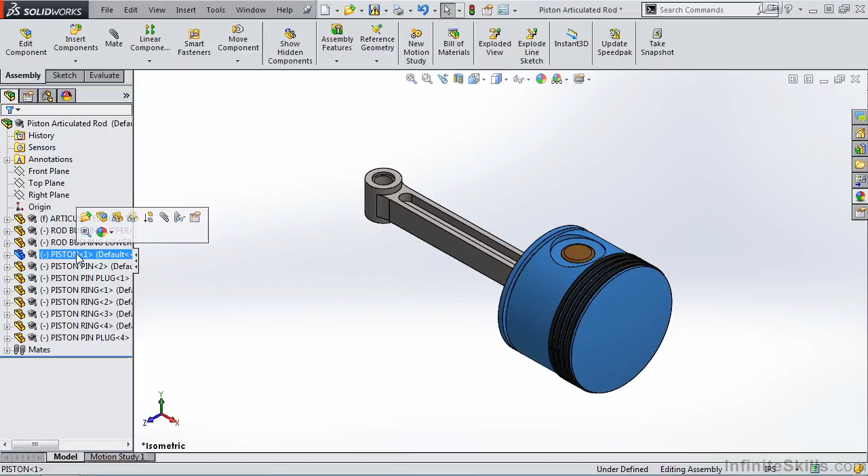One method for hiding the piston is to do it in the Feature Manager design tree. Simply select the piston, a pop-up menu appears, and notice we have two icons with glasses. The first one is Hide Components. The second one is Change Transparency. We'll select Hide Components. And now notice on the screen, the piston is hidden.

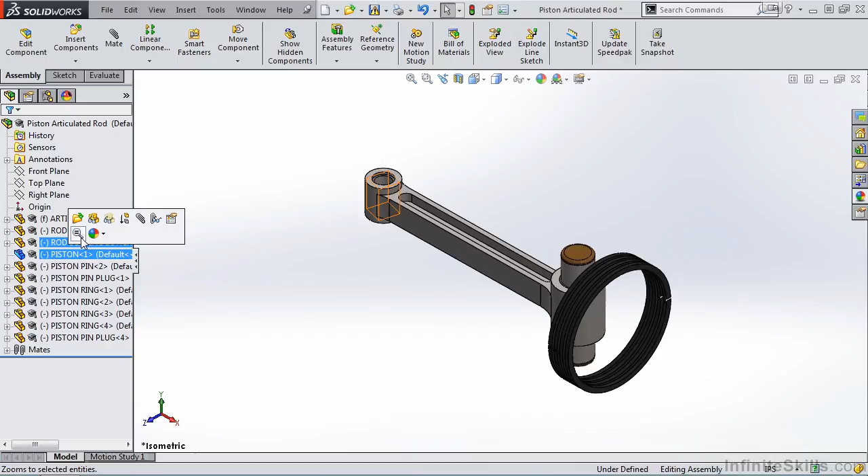Also notice in the Feature Manager design tree, the change in the part graphic. Notice the part icon graphic as compared to the other parts. If we would like to unhide the piston, you simply click on the piston and select Show Components.

Another option for hiding a component is to select a component on the screen. The same pop-up menu appears. Now this time, instead of selecting Hide Components, let's try Change Transparency. And it simply changes the transparency so you can see through the part.

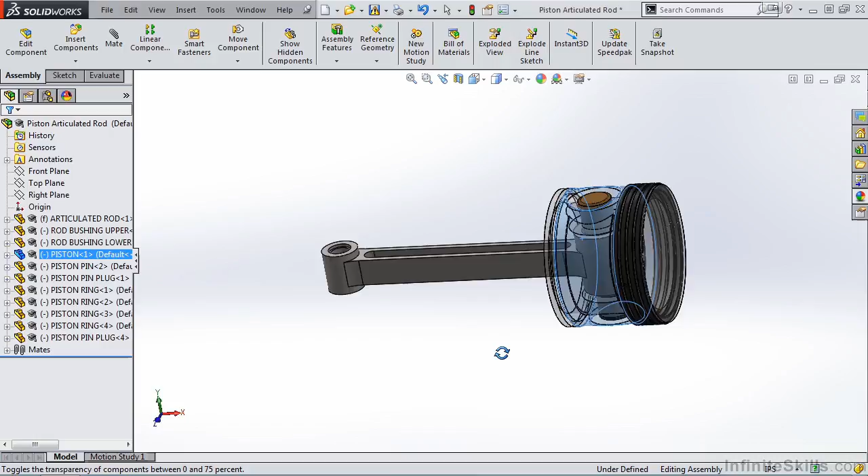Now we have one more option for hiding and showing components along with changing the transparency, and that is through the task pane. If we expand the task pane, notice we have 4 columns. The first one is for Hide Show. The second one is for Display Mode. Third one, Appearances. And the last one, Transparency.

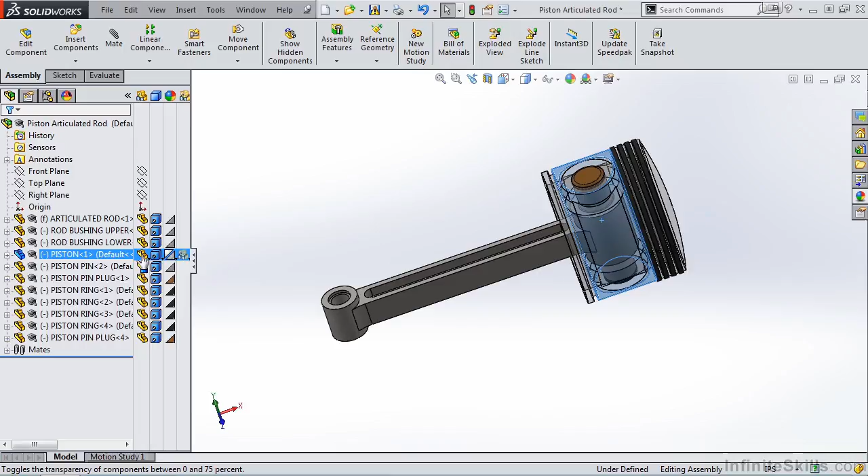So let's talk about the first column, Hide Show. If I would like to hide, for example, the piston, I select Piston in that column, and now the piston is hidden on the screen. Now, if we would like to change the transparency of the articulated rod, and this is the articulated rod, we would simply select over here, and once again, you'll see it changes the transparency.

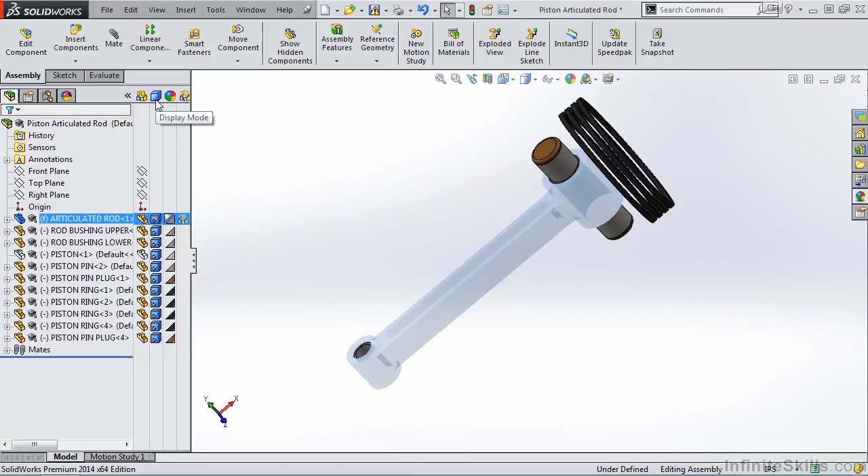So again, the first column is for Hide Show. The fourth column is for transparency. The second column here is nothing more than display mode. So for example, let me unhide the piston and then change the transparency on the articulated rod.

This time, let's go to the piston and change the display mode. Let's change it to a wireframe and notice the update on the screen. The third column is for appearance. This is nothing more than the appearance that was assigned to each part.

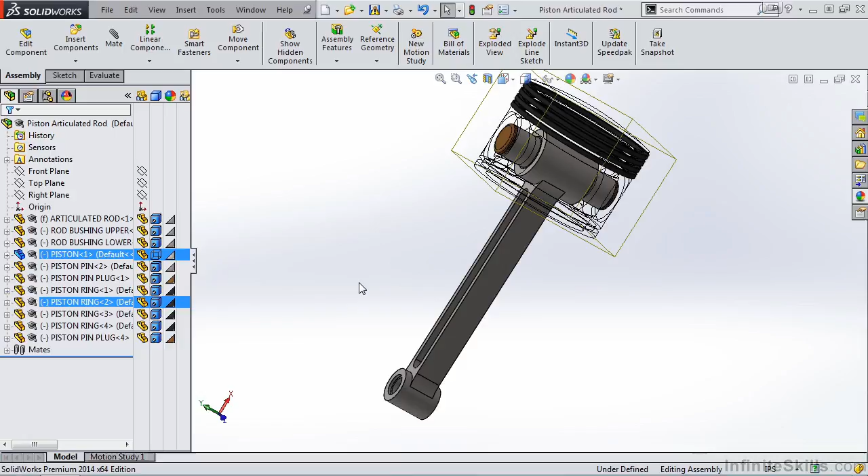So having the capability to hide and show components and change the transparency allows you to visualize very complex assemblies, making it easier to work with the assemblies.